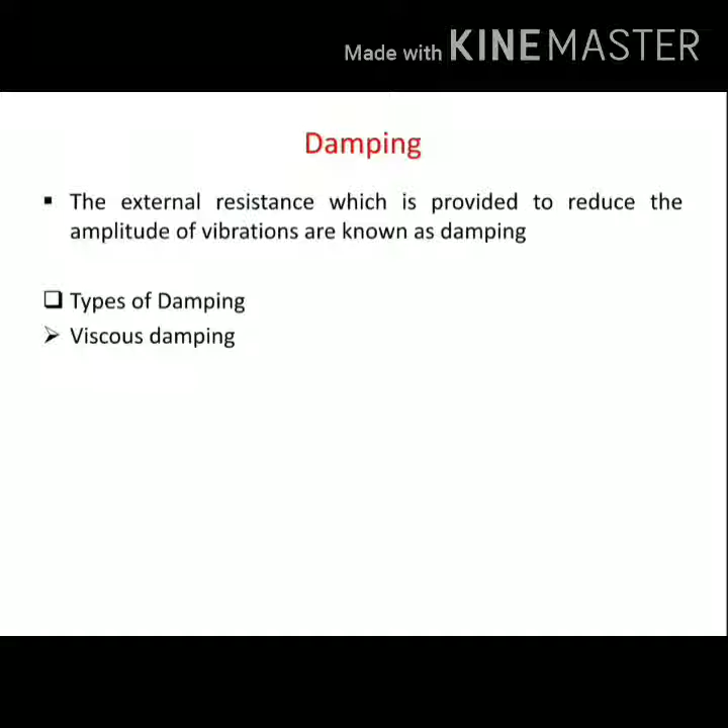Types of damping: first, viscous damping. This is the most commonly used damping mechanism to reduce the amplitude of vibrations. In viscous damping, there is a piston and cylinder arrangement with viscous fluid. So when the system vibrates in a fluid medium like air, gas, water or oil, resistance is offered by the fluid to the vibrating body, which causes energy to dissipate.

Second type, dry friction or Coulomb damping. This type of damping occurs due to friction between rubbing surfaces which are dry or unlubricated.

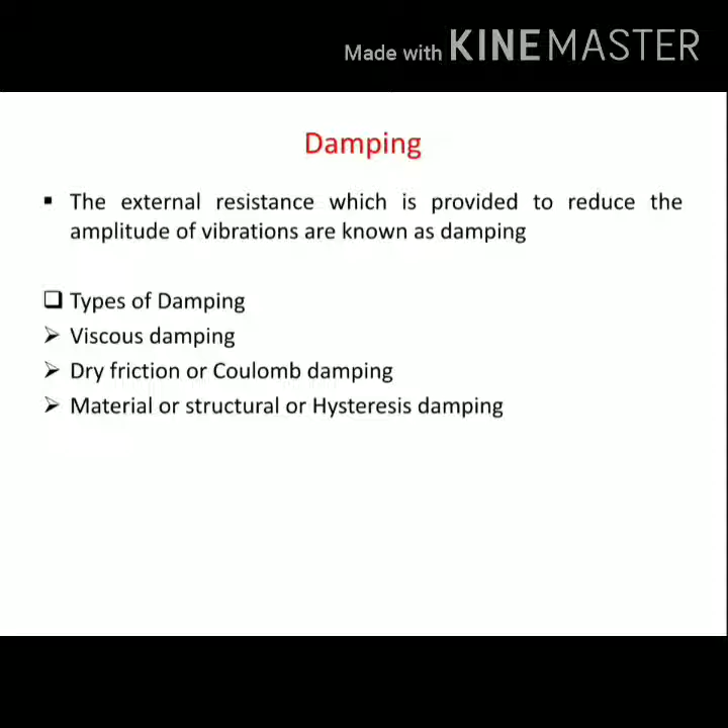Third type, material or structural or hysteresis damping. It is an inherent characteristic of the material, and the resistance is offered by the elastic properties from within the body. So there is an intermolecular friction in the structure which opposes its movement. The magnitude of this damping is very small as compared to other dampings.

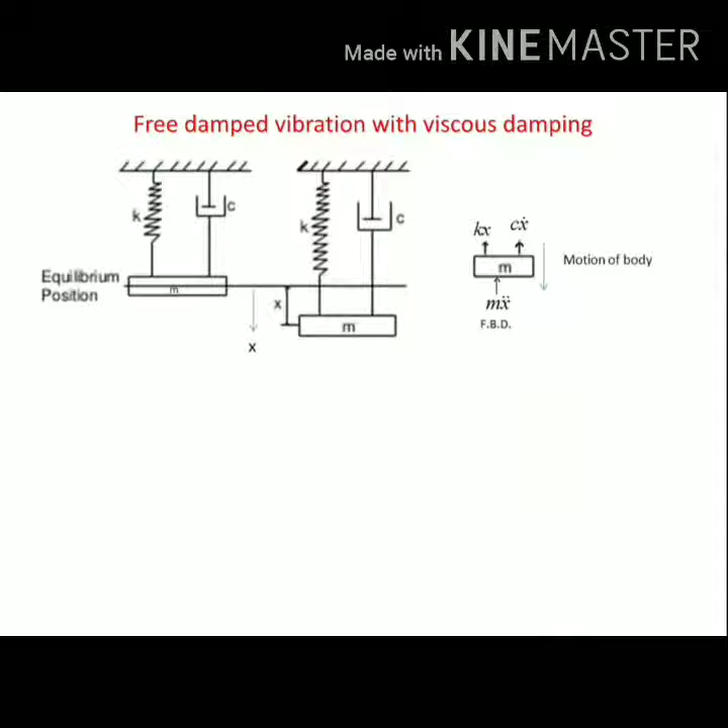So according to D'Alembert's principle, the sum of inertia force and external forces acting on the system must be equal to zero.

So we write m x double dot, that is inertia force, plus external forces, that is damping force and spring force: c x dot plus k x is equal to zero. So m x double dot plus c x dot plus k x is equal to zero. This is the equation of motion for free damped vibration of a single degree of freedom system.

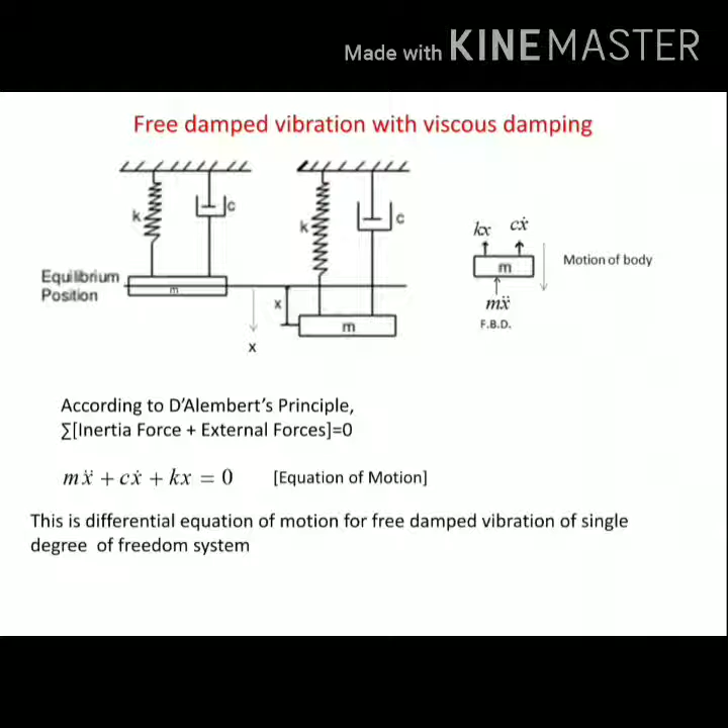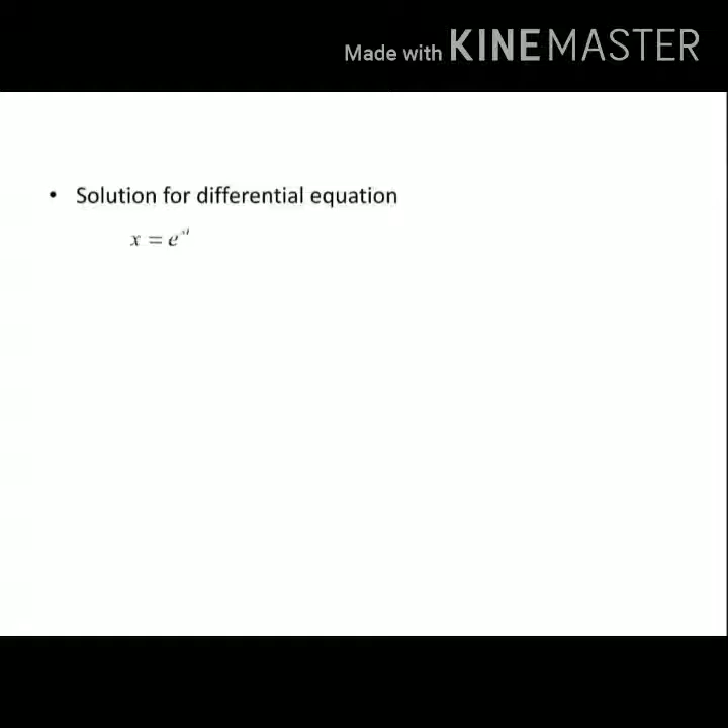Now see the solution for the differential equation. We can write the solution in the form x is equal to e raised to st, where s is a constant. Differentiating with respect to t, dx by dt, that is x dot, is equal to s e raised to st. Differentiating again with respect to t, we get x double dot is equal to s square e raised to st.

Putting these values into the differential equation, we get m s square e raised to st plus c s e raised to st plus k e raised to st is equal to zero. The e raised to st terms cancel, giving m s square plus c s plus k is equal to zero. This is the characteristic equation.

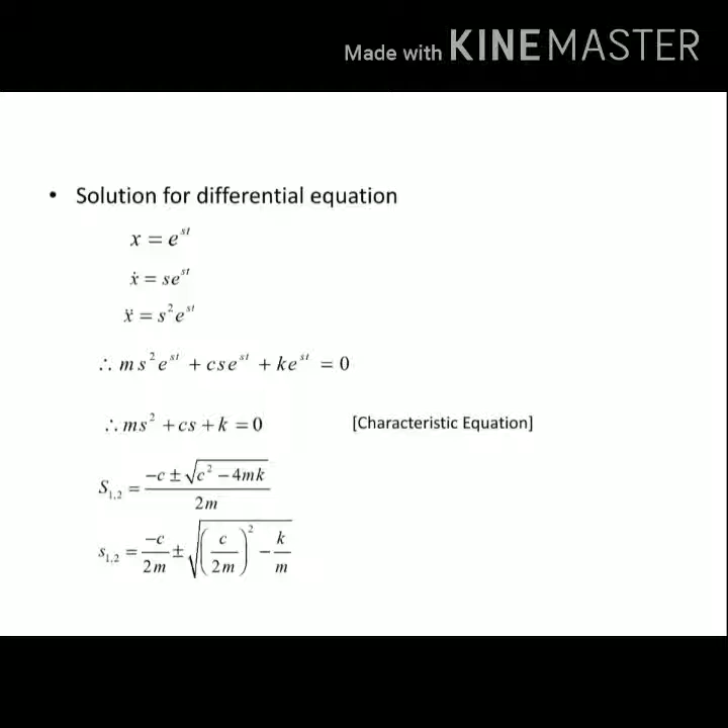This characteristic equation is in the form of a quadratic equation, which has two roots, s1 and s2. So s1 and s2 equal minus c plus or minus the square root of c square minus 4mk, divided by 2m, or we can write the roots s1 and s2 equal minus c divided by 2m, plus or minus the square root of (c divided by 2m) square minus k by m.

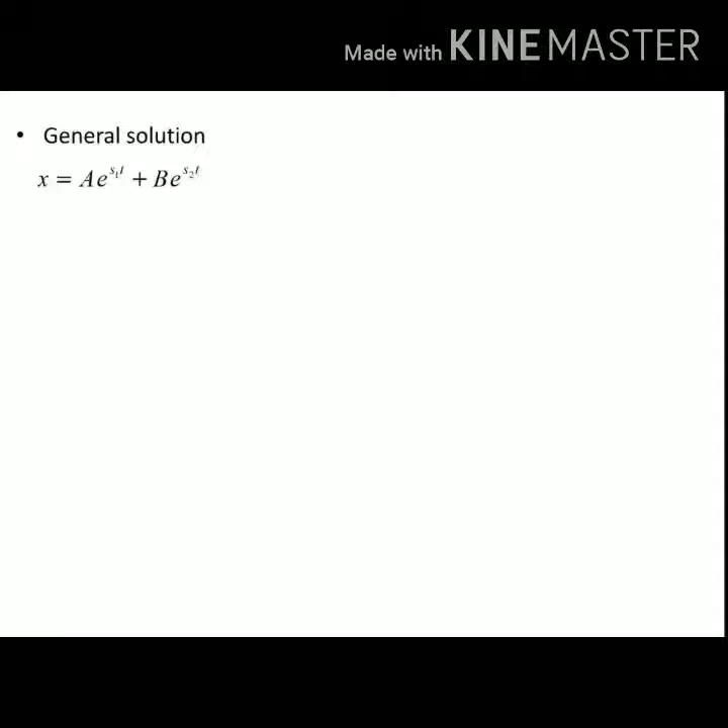The general solution to the differential equation can be written as x is equal to a e raised to s1 t plus b e raised to s2 t, where a and b are arbitrary constants determined from initial conditions.

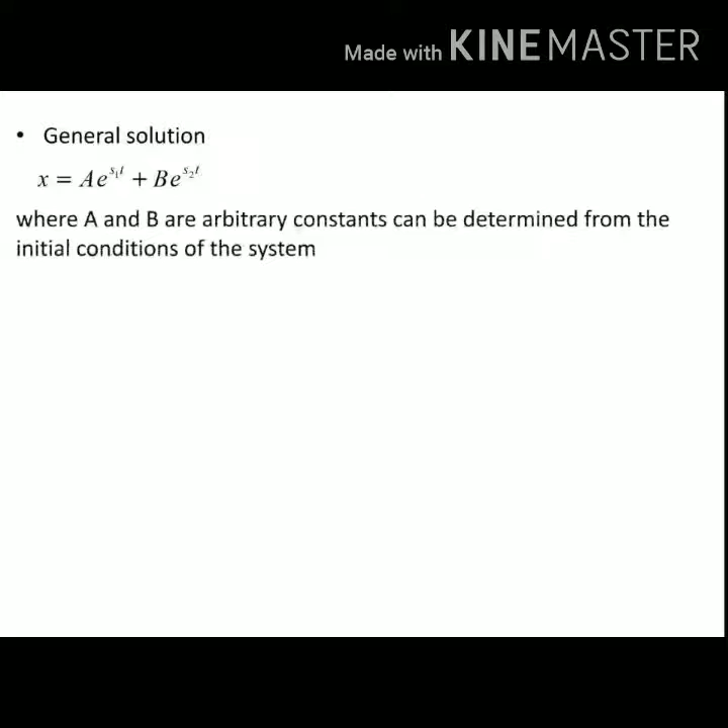So for further analysis of the equation of motion for the free damped vibration system, we consider two terms: critical damping coefficient, denoted by C subscript c, and damping ratio, denoted by zeta.

Critical damping coefficient is defined as the value of damping coefficient C for which the radical in the equation becomes zero. So at C equal to Cc, the radical term in the equation, square root of (c by 2m) square minus k by m, is equal to zero.

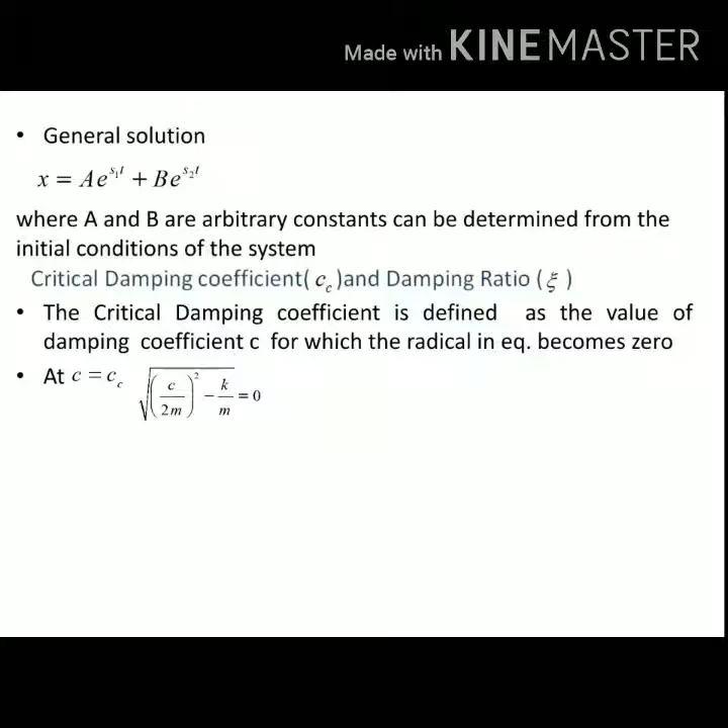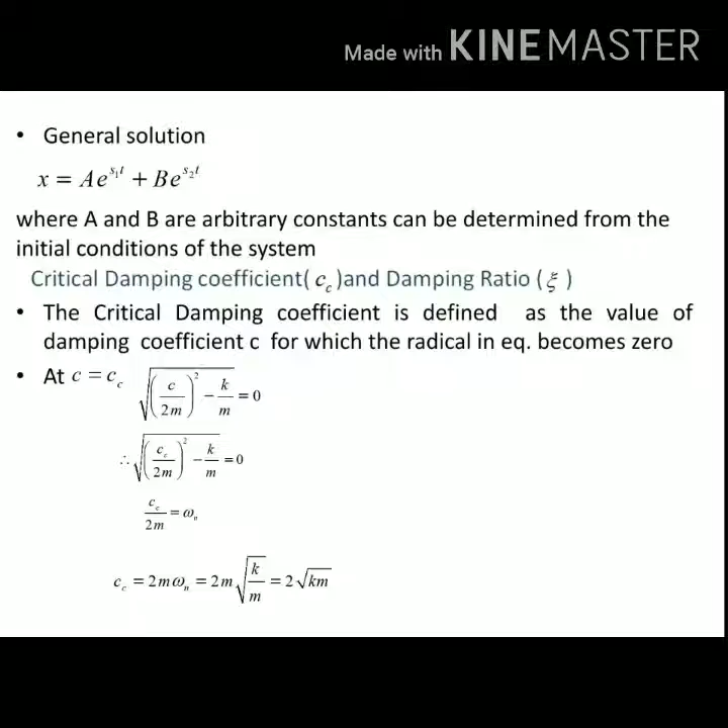So we can write c equal to cc. Under top, cc divided by 2m bracket square minus k by m is equal to 0. So cc divided by 2m is equal to under root k by m, where under root k by m is omega n, the natural frequency. So cc is equal to 2m omega n, which is 2m under root k by m, equal to 2 under root k into m. So the critical damping coefficient depends on the mass of the body and the stiffness of the spring.

Then we see the damping ratio or damping factor is denoted by zeta. It is the ratio of damping coefficient to the critical damping coefficient. Mathematically, we can write zeta is equal to C by Cc.

So the two roots of the general solution are in terms of the critical damping coefficient and damping factor. We know that S1 and S2 is equal to minus C by 2m plus or minus under root of C by 2m bracket square minus k by m.

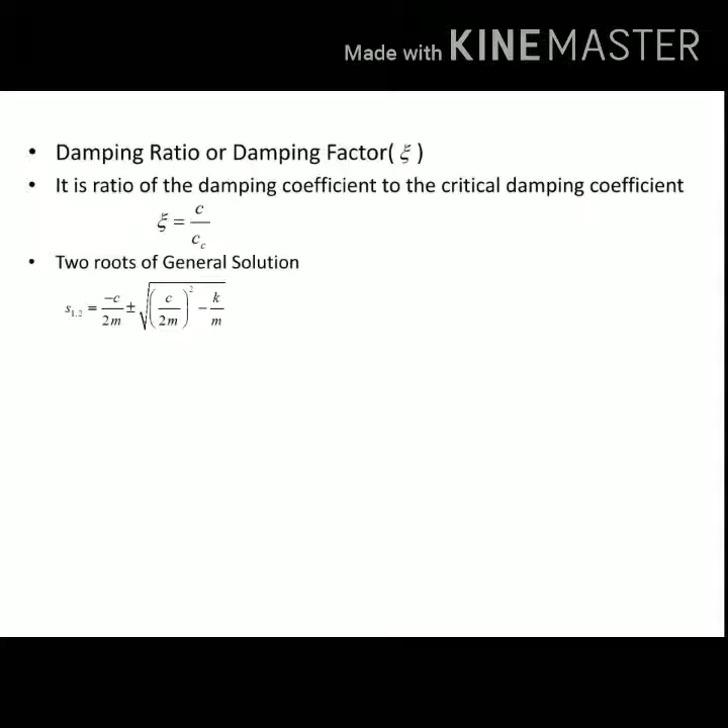So we can write zeta is equal to c by cc, which is c divided by 2m omega n. So c by 2m is equal to zeta omega n, and k by m is equal to omega n square. Putting these values into the equation, we get the roots s1 and s2 equal to minus zeta plus or minus under root of zeta square minus 1, into omega n.

Depending upon the value of the damping ratio, there are three types of damped systems. First, overdamped system, zeta greater than 1. Second, critically damped system, zeta equal to 1. Third, underdamped system, zeta less than 1.

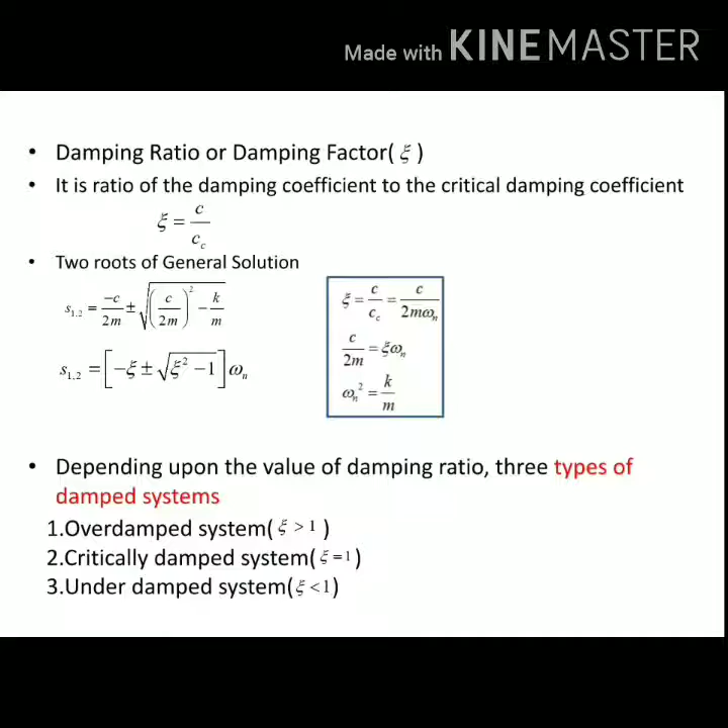Overdamped system, zeta greater than 1. In an overdamped system, the damping ratio is greater than 1, or the damping coefficient is greater than the critical damping coefficient. So the two roots for the overdamped system, S1 and S2: S1 is equal to minus zeta plus under root zeta square minus 1 into omega n. S2 is equal to minus zeta minus under root zeta square minus 1 into omega n. Here these two roots S1 and S2 are real and negative. So the solution for the equation of motion in this case is x equal to a e raised to minus zeta plus under root zeta square minus 1 into omega n t, plus b e raised to minus zeta minus under root zeta square minus 1 into omega n t.

So we determine the constants a and b by applying the initial conditions. At time t equal to 0, x is equal to x0, and x dot is equal to 0. So we determine the constants a and b and put them into this equation, and write the solution for the differential equation.

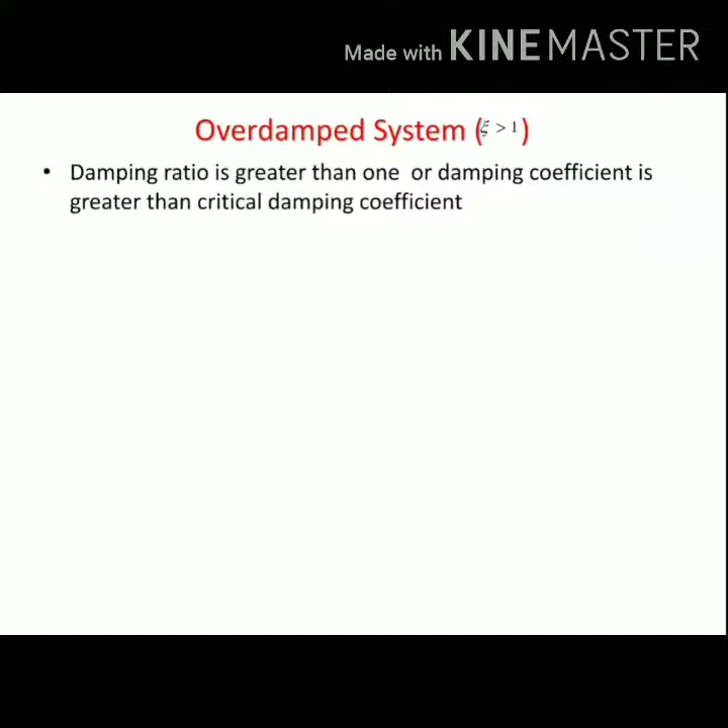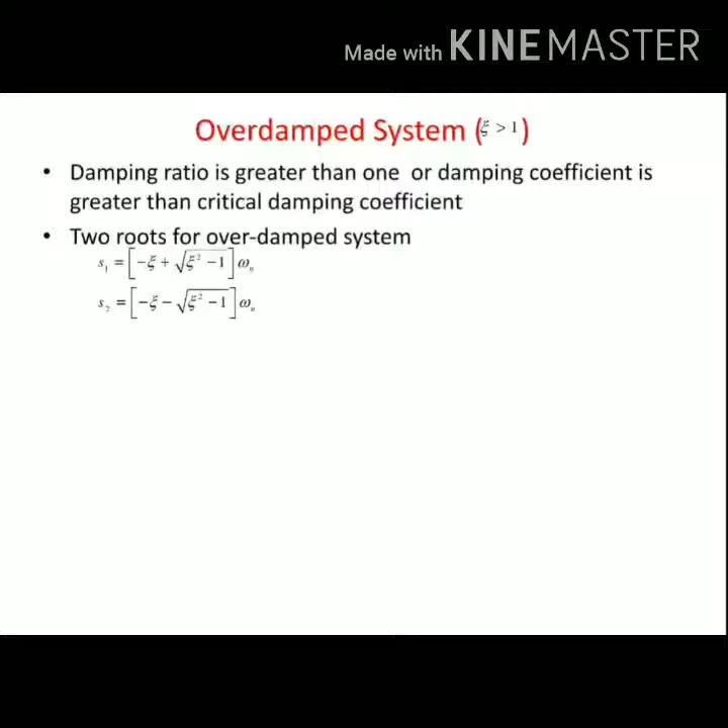Overdamped system, zeta greater than 1. In an overdamped system, the damping ratio is greater than 1, or the damping coefficient is greater than the critical damping coefficient. So the two roots for the overdamped system: S1 is equal to minus zeta plus under root zeta square minus 1 into omega n, and S2 is equal to minus zeta minus under root zeta square minus 1 into omega n. Since zeta is greater than 1, the two roots S1 and S2 are negative and real. So the solution for the equation of motion is x equal to a e raised to s1 t, where s1 is minus zeta plus under root zeta square minus 1 into omega n, plus b e raised to s2 t, where s2 is minus zeta minus under root zeta square minus 1 into omega n.

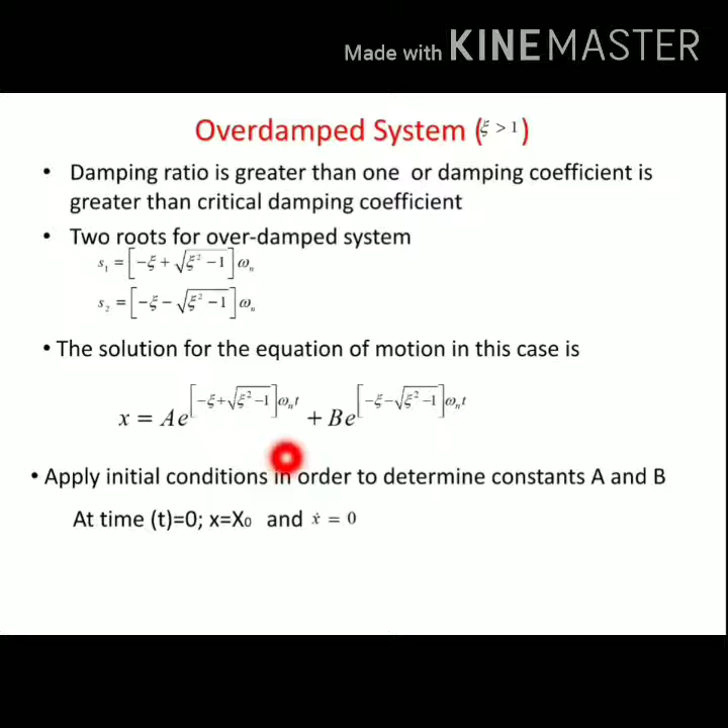So we determine a and b by applying the initial conditions: at time t equal to 0, x is equal to x0, and x dot is equal to 0. We put the constants a and b into this equation, and get the general solution to the differential equation in the overdamped system.

Critically damped system, zeta is equal to 1. In a critically damped system, damping ratio is 1, or damping coefficient is equal to critical damping coefficient. For the two roots of the critically damped system, we put zeta equal to 1 in the equations of S1 and S2, so we get S1 equals S2 equals minus omega n. So the two roots are real and equal quantities.

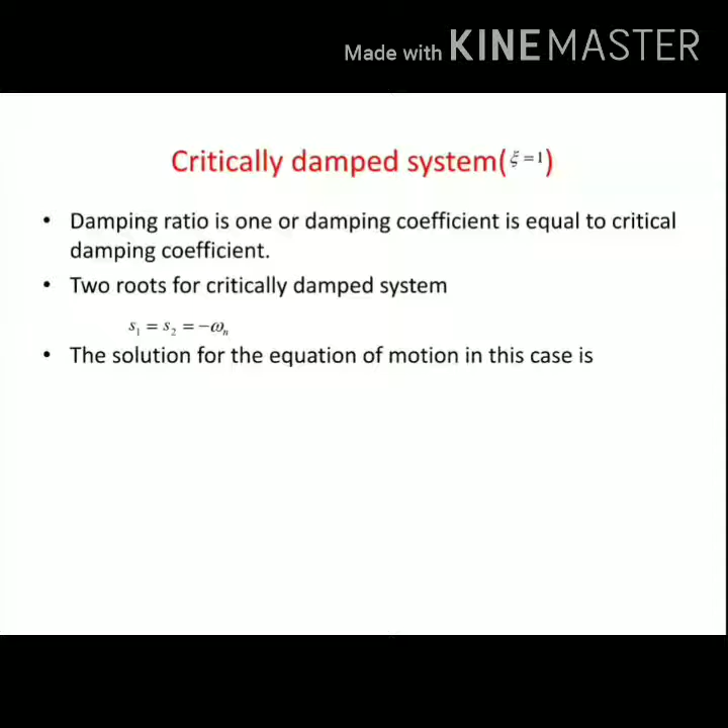So the solution for the equation of motion in this case is x equals a e raised to s1t plus b into t e raised to s2t. Putting the values of s1 and s2 in this equation, we get x equals a e raised to minus omega n t plus b into t into e raised to minus omega n t. So x is equal to (a plus b into t) into e raised to minus omega n t.

To determine the constants a and b, we apply the initial conditions: at time t equals 0, x equals x0 and x dot equals 0. Putting the values of a and b into this equation, we get the general solution to the differential equation for the critically damped system.

We see the application of the critically damped system in hydraulic door closures. If you have opened the door, it will get back to its original position within the shortest possible time. See another example: critical damping is used in large guns, so that after firing, the gun returns to its original position in minimum time without vibrating, making it ready for the next firing without delay.

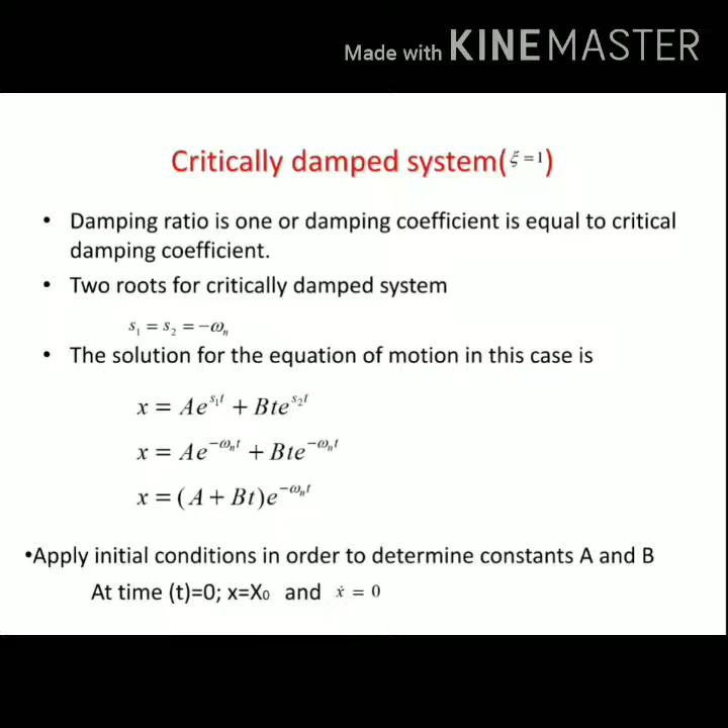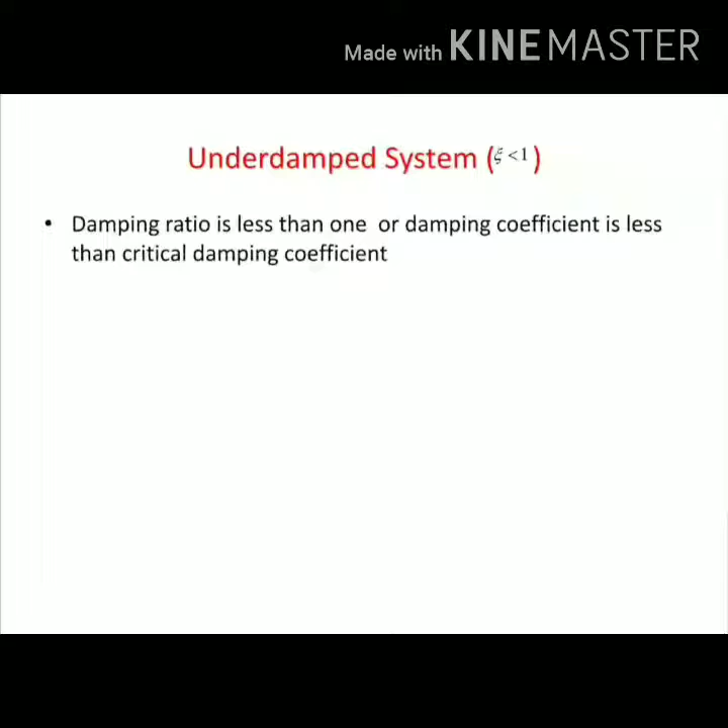Underdamped system, zeta is less than 1. In an underdamped system, damping ratio is less than 1, or damping coefficient is less than critical damping coefficient. So the two roots for the underdamped system are S1 equals minus zeta plus i under root of (1 minus zeta square) into omega n, and S2 equals minus zeta minus i under root of (1 minus zeta square) into omega n. In the underdamped system, since zeta is less than 1, the two roots S1 and S2 are complex conjugates.

So the solution for the equation of motion in this case is x equals a e raised to s1t. Here we put the value of s1 as minus zeta plus i under root of (1 minus zeta square) into omega n, plus b e raised to s2t, where s2 is minus zeta minus i under root of (1 minus zeta square) into omega n.

So we take common e raised to minus zeta omega n t. So we get x equals e raised to minus zeta omega n t, in bracket, a e raised to i under root of (1 minus zeta square) into omega n t, plus b e raised to minus i under root of (1 minus zeta square) into omega n t.

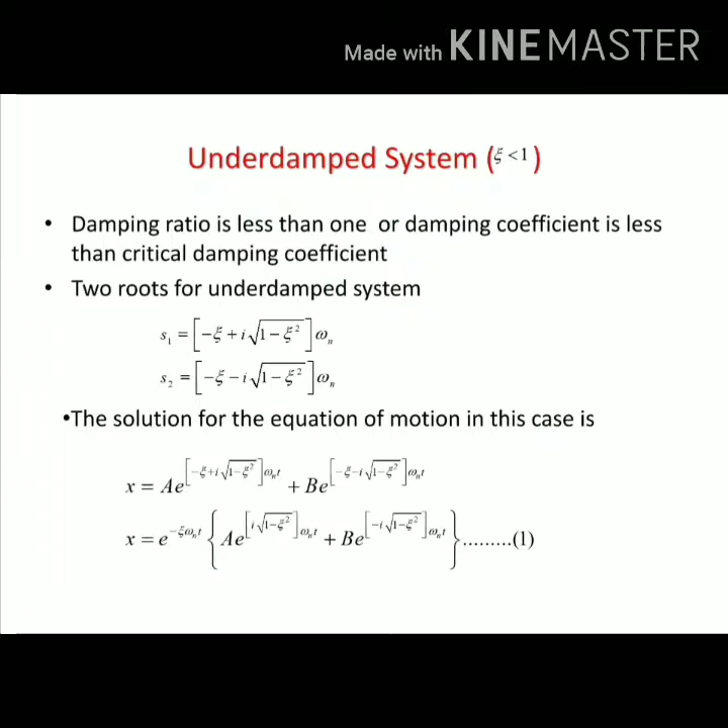Put under root of (1 minus zeta square) into omega n equal to omega d in equation 1, where omega d is the damped natural frequency and omega n is the natural frequency. So we get equation 1: x equals e raised to minus zeta omega n t, in bracket, a e raised to i omega d t plus b e raised to minus i omega d t.

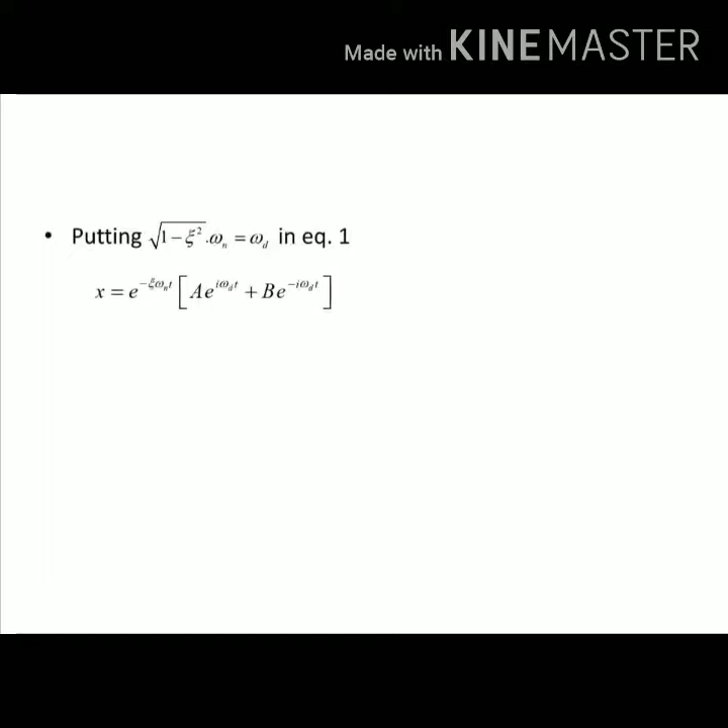Using Euler's theorem, we can write x equals capital X e raised to minus zeta omega n t into sine of (omega d t plus phi). Here X and phi are constants, determined from the initial conditions. This system is used in shock absorbers.